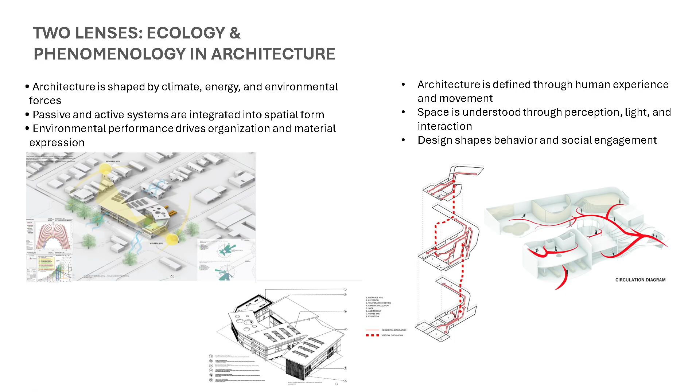focuses on human experience. It looks at movement, perception, light, and interaction as the key drivers of design. For example, it considers how users move through space and how they feel and interact within it. These two approaches provide different ways of understanding architecture, one through performance, and the other through experience.

These theories directly influence design decisions. Ecological thinking leads to strategies such as shading, orientation, and climate-driven form. This means that environmental factors directly shape the building's layout and systems.

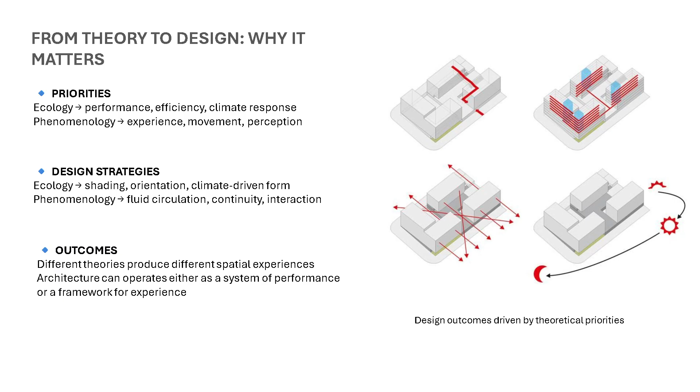Phenomenological thinking emphasizes circulation, continuity, and spatial interaction. This focuses on how users experience the building through movement and perception. As a result, different theoretical priorities produce different spatial experiences. Architecture can operate as a system of performance or as a framework of experience.

EnviroLearn is a climate-driven learning environment. This project is organized through a lifted learning spine and courtyard system. Climate strategies shape the massing, orientation, and building envelope. The spine organizes circulation, shading, and airflow, creating a clear movement system through the building.

For example, the lifted spine helps reduce direct solar exposure while allowing airflow through the space. This improves both shading and natural ventilation. The courtyards provide daylight, ventilation, and microclimate zones. They also create shaded outdoor spaces that enhance thermal comfort and support social interaction between students.

And these strategies are not added later. They directly shape the form and spatial organization of the project.

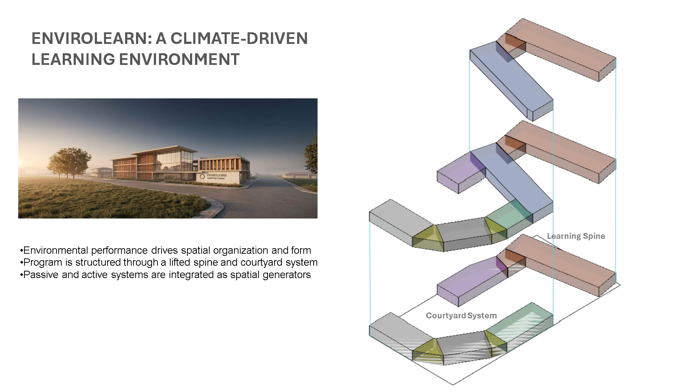Yuecheng Courtyard Kindergarten takes a different approach. It uses a continuous courtyard and rooftop system to create fluid circulation. Movement becomes the primary driver of spatial experience, and the continuous loop allows users to move freely through the building without clear boundaries. This creates a more dynamic and interactive movement.

The design encourages exploration, interaction, and play. This reflects a phenomenological approach where experience and movement shape spatial organization.

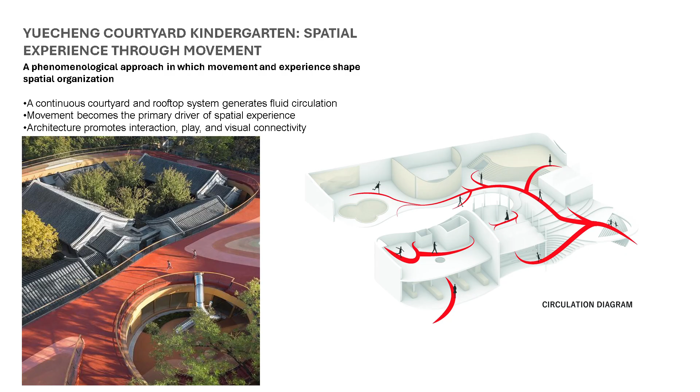In contrast, Yuecheng uses a continuous loop-based organization. Spaces flow into one another, creating fluid transitions and non-hierarchical movement. This allows users to move more freely without a fixed path. This difference also affects how users understand the building.

In my project, movement is structured and guided, while in the precedent, movement is more open and exploratory. And this highlights the contrast between controlled organization and continuous flow.

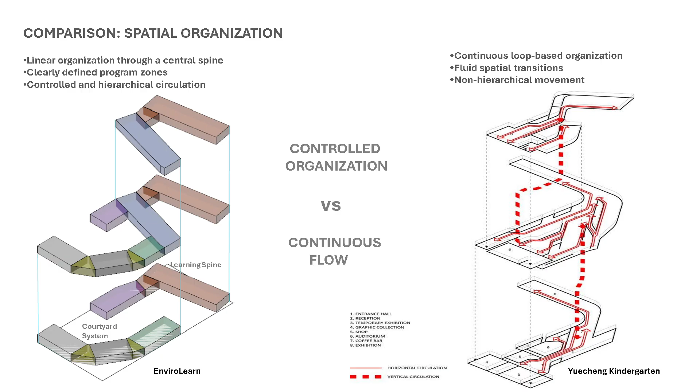This difference is not only about spatial organization, but about design intention. In EnviroLearn, the design is driven by environmental performance, where climate and systems directly influence the form and layout. And this means decisions are based on orientation, shading, airflow, and efficiency. Environmental performance becomes the main driver of design.

While Yuecheng is driven by human experience, movement, perception, and interaction shape how space is organized. This design focuses on how users feel and move within the building, and also shows how design is not only about creating form, but about responding to spatial priorities.

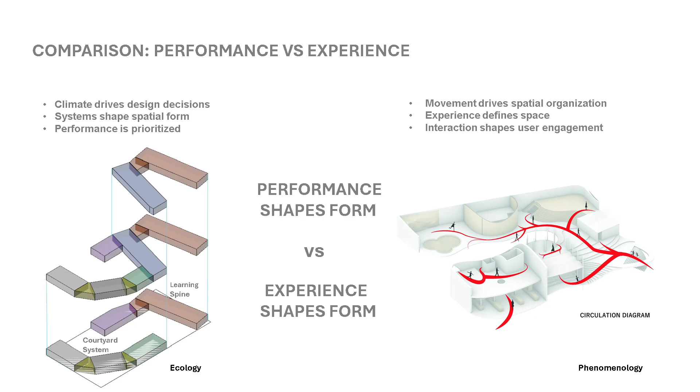And in my project, environmental performance shapes the design decisions, while in the precedent, human experience becomes the primary driver. This reflects the difference between ecological and phenomenological approaches to design. So the difference is not just how space looks, but what drives the design.

At the user level, these differences become more evident. EnviroLearn creates a directed experience where movement is guided and learning zones are clearly defined. This supports focus, safety, and structured learning, and students can move through the building in a clear and predictable way.

While Yuecheng creates an exploratory experience, students move freely through continuous circulation, encouraging interaction and play. This creates a more dynamic and social learning environment. These differences also influence how students behave in the space. A structured system can support concentration and organized learning activities.

And on the other hand, the exploratory system encourages creativity, play, and social interaction between students. While an exploratory environment supports discovery, a more structured system provides safety, clarity, and focused learning. And in the end, both approaches support learning, but through different spatial strategies.

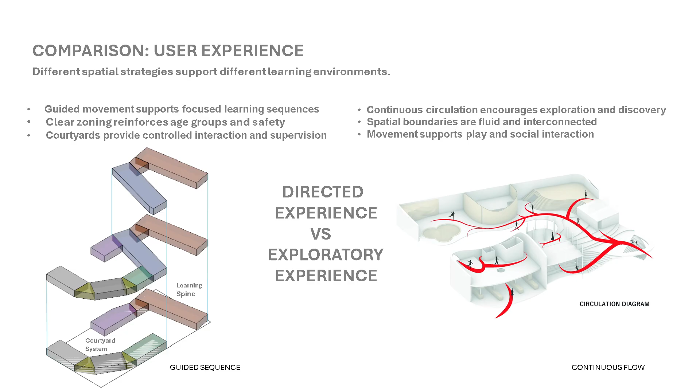This project demonstrates that performance and experience are not separate ideas. Environmental strategies shape the building's form, organization, and systems. At the same time, movement and spatial organization define how users experience the space.

Performance and experience are not separate. They work together to shape both how a building functions and how it's experienced. Together, they create a learning environment that is both efficient and experiential.